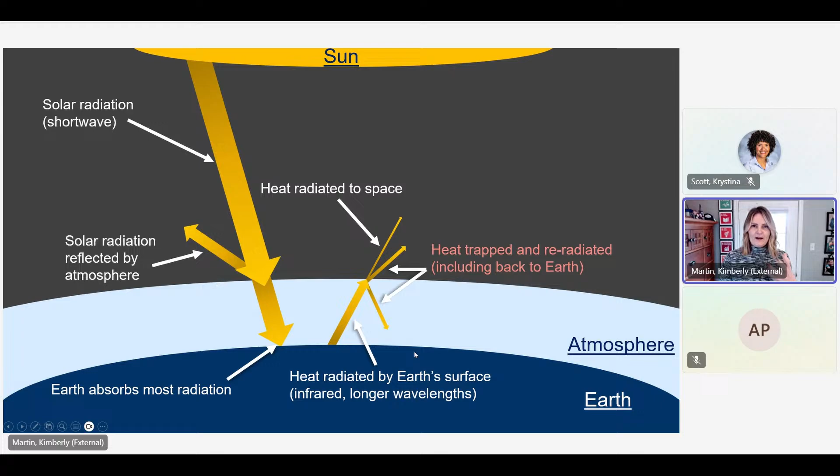What that means on a basic level is we have solar radiation coming from the sun. The thing to note about that is it's coming through in short waves. It gets to Earth, not all of it, but most of it, and it's then radiated out. When it's radiated back from Earth, it changes to longer wavelengths, the infrared zone of wavelengths. What that means is those longer wavelengths go back out to our atmosphere and they interact with the greenhouse gases that are there. The more we increase things like carbon dioxide, a key greenhouse gas, the more those longer wavelengths interact and re-radiate back to Earth. And that's what's really happening, and what we're really worried about is that heat trapped and re-radiated.

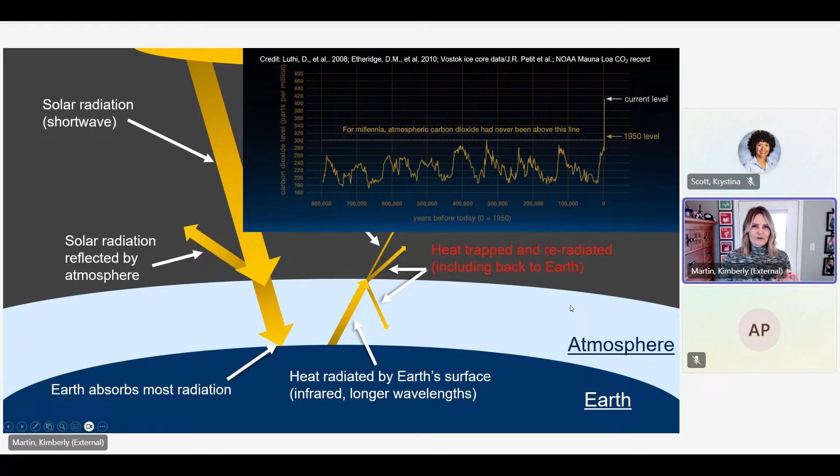And if you've seen this chart before, then you know that carbon dioxide in very recent times has increased after the Industrial Revolution at incredible rates to levels that haven't been seen for millennia. So that's what we're talking about when we talk about reducing greenhouse gases and why it's affecting the climate. So when I say climate action should be the place where we focus, I think of this infographic provided by Fuso Nerini et al. This is really a great way to map out how focusing on climate action may seem like one small part of all the things we could do when it comes to sustainability, but it actually has really broad impacts. I want to make that case for you.

So when we think of climate action, we can break it down into pieces. So one is strengthening resilience and adaptive capacity to climate-related disasters. And by doing so, we can impact SDGs 1, 2, and 11 as well. So as a geotechnical engineer in the geotechnical industry, you may say, what does that mean? How am I actually strengthening resilience and adaptive capacity? And why should I do that? Well, here's an interesting infographic from First Street, a company that does risk assessments for insurance companies. And what this chart is showing is that for flooding, this is saying how things have changed from a 1 in 100 year return period.

So places in white, the return period for a flood event, a 1 in 100 year flood event, is still 1 in 100, 1 in 90 years. But in many places, and you see along coasts and you see places where we have a huge population center, that 1 in 100 year return period is now 1 in 10 years or 1 in 5 years.

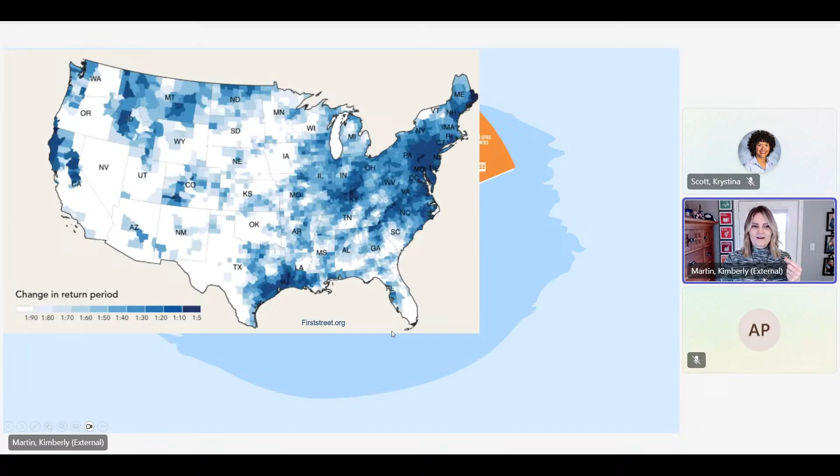So things are increasing. Climate disasters, we're seeing them in the news all the time. They're increasing, and they're increasing where people are moving to as well. So as engineers, we need to think, okay, we used to design for here, for this white area, but that white area has now become almost dark blue in some key places where we live and design.

But as a geotechnical engineer, what do we do about that? What are we building that addresses this climate resiliency and climate adaptation? One of the key things where you'll see this is coastal resiliency, preventing the flood interaction with coastal waters. So as an example, here's a case where Keller was working on the East Side Coastal Resiliency Project in Manhattan. This is to prevent the worst case flooding, particularly after we saw what happened with Hurricane Sandy, with $70 billion of damage from that hurricane.

So at the East Side Coastal Resiliency, we have a place where Keller and the geotechnical industry were providing 2,500 aggregate piers and 500 micro piles to support this new infrastructure that will help prevent the worst case damage. And you can imagine with that level of damage, how much poverty and how much damage to society was in that area all along the eastern seaboard. So now we as geotechnical engineers in the geotechnical industry can actually help prevent that from happening again.

Another place that climate action and carbon reduction comes into play is promoting mechanisms to raise capacity for climate planning and management. So we have to build the workforce of tomorrow, right, to do this. And when it comes to promoting capacity, we can think about what does our future workforce look like? And how are they going to be trained for the skills to design and build the things of tomorrow that are coming down the pipeline?

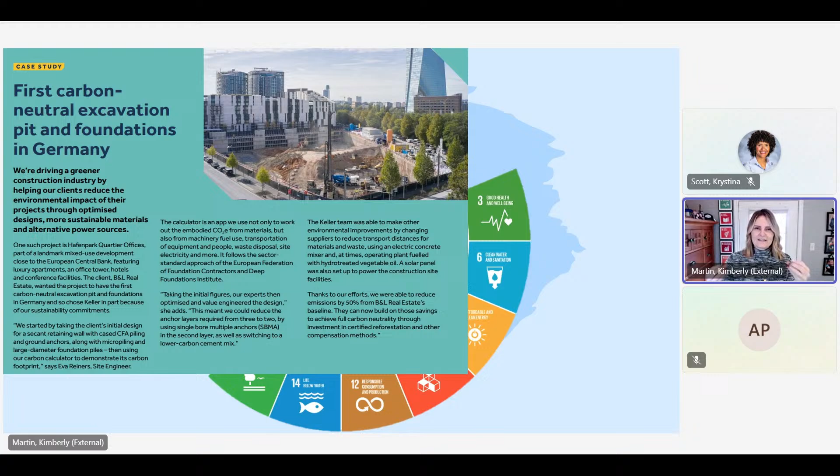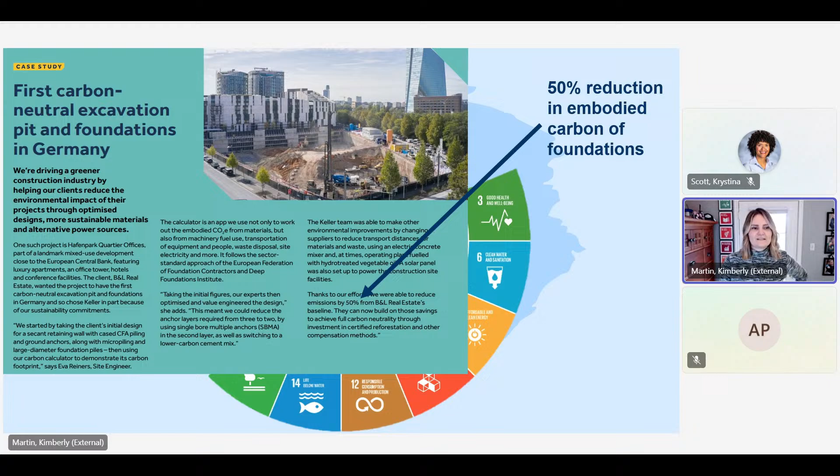And it was a lot of work for our teams, but having that owner say this is important to us allowed our teams to spend the time and get this done, ultimately having a 50% reduction in the carbon of the foundations based on what was originally proposed. So by doing this, we're using less resource, we're oftentimes reducing pollution, making it better for our workforce and a safer solution as well. So now you see all the ways that carbon reduction can impact sustainability.

So I think that makes it a good place to start, but there also are specific drivers as well. So this is in the EFFC DFI Carbon Reduction Guide. This is from the European Federation of Foundation Contractors and the Deep Foundations Institute. And it's just highlighting all these different ways that we see the push for low carbon solutions. So for example, legislation's a big one. We have a lot of up and coming legislation, things that have already been passed or in the works.

We have the SEC rules on reporting scope 1 and 2 for major corporations that are publicly listed. We have the federal acquisition regulation, which was requiring federal contractors to actively report their scope 1, 2, and 3 emissions. I'll define those scopes in a little bit, but basically report their carbon emissions, also the risks associated with climate change and science-based targets. Many of us wouldn't be major contractors for the federal government, but we often work for those federal contractors. So that means they may need that information from us.

Also, California is leading the way with sweeping climate measures. Aside from just climate reporting, they're definitely the state that's leading the way, saying they want major corporations that operate in California to be reporting their carbon emissions. That is a funded program and holding up in courts, so that is coming.

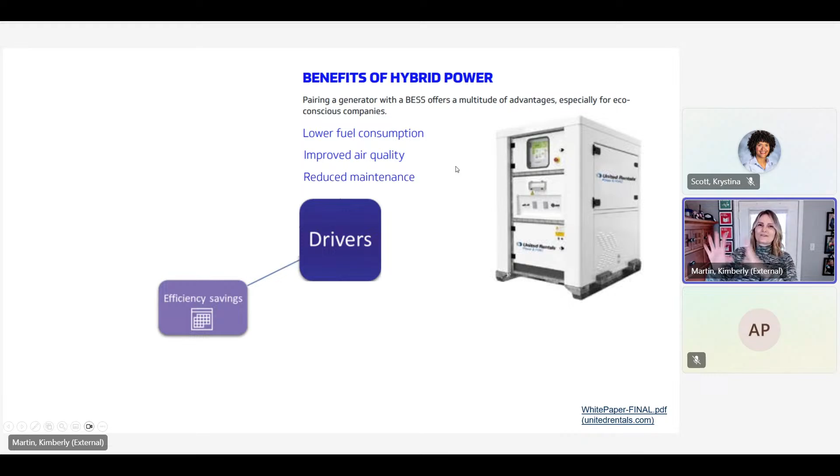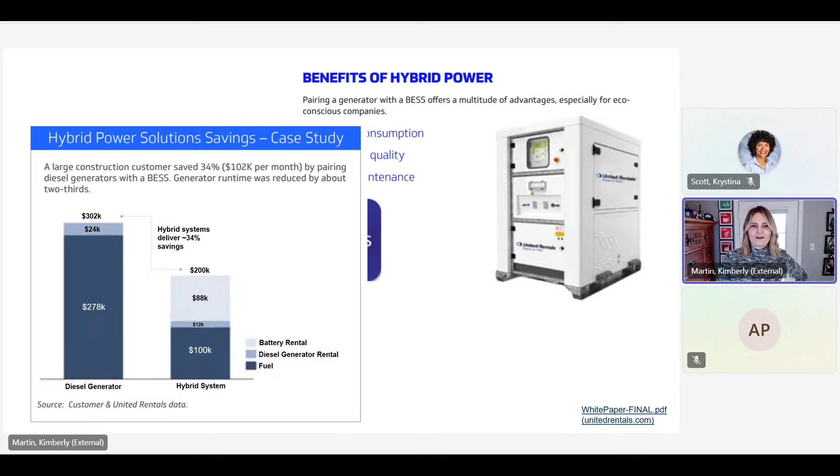So one thing that we can think about when we're thinking of efficiency is things like battery energy storage systems. So using hybrid generators, they can lower the fuel consumption, improve air quality. Like we said, lowering carbon can also do things like improve life on land and the other SDGs. And also they reduce maintenance. So this is just from United Rentals showing that even though the cost of the rental could be more, you're typically going to make back that savings because you're not going to pay for it in gas and maintenance.

Another driver is employee demand. And this is really interesting outside of our industry, but Lego is saying, you know, it's so important to our employees, we're going to link sustainability targets to the entire salaried workforce for their bonus structure. And they're doing this to attract and retain particularly younger generations. So that's something interesting to think about for the geotechnical industry.

Then we have things like managing risk. A lot of this has to do with the framework, the Task Force for Climate-Related Financial Disclosures. This is a really key framework that many companies that are publicly listed will report to. It's required in many European jurisdictions, particularly with new legislation coming out of Europe, but also in the California legislation as well. And what this is saying is a company needs to really assess how climate change is going to impact them in their operations and in business decisions that they make from a risk and opportunity standpoint. So Keller actually reports to TCFD.

So what this can look like is running different scenario analysis. So for example, this one would be, what if in Europe they say we can't use diesel-powered drill rigs after 2030? What would that mean to Keller as a business? What is that risk for us if in 2030 we couldn't use our diesel rigs anymore? That would be a big financial risk. So we run that scenario and then report that out so our shareholders and our stakeholders can understand what the risk is to us with the transition to a low carbon economy.

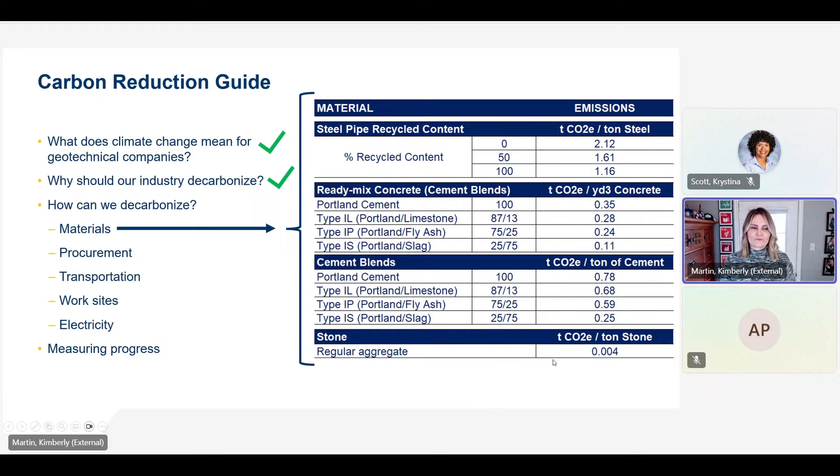So when we look at a ton of stone, the emissions are orders of magnitude less than concrete or steel or cement. So I just want to give you a flavor of what those are. I'm not saying we can't use steel or concrete or cement, but just recognize the difference in those emissions for those materials. So when we think about reducing emissions in the materials we use, we like to use the carbon hierarchy. It just gives us a good concept, right, to follow.

Okay, at the top, eliminate. Do we need this foundation in the first place? And believe it or not, we do have situations where we have to go to the client and say, we actually don't think you need a deep foundation solution. It does happen, but maybe we can eliminate it. Maybe we can do a Teams meeting instead of fly. Maybe we can just simply eliminate the concrete, cement, or steel from the solution. That's the first step. If we can't, then we move down.

Okay, we need this foundation, but now we're going to reduce the amount of materials we use. This is smarter design, more analysis, clever design to say, okay, can we reduce the number of piles and pile diameters?

Can we improve the efficiency of our process on site to reduce materials and also reduce fuel as well? Once we do that, then we can get to substitute. So this is what I was saying before with the substitution of materials. How much Portland cement can we replace with slag or fly ash? What can we do with renewable diesel, as an example, as a replacement for fuel?

Substitute is below reduce because we don't want to waste these important alternative materials. Just because slag is low carbon doesn't mean we should use as much as possible. We need to have that clever design, reduce what we're going to use, and then do the substitution. Then at the end, you can compensate with high quality carbon offsets.

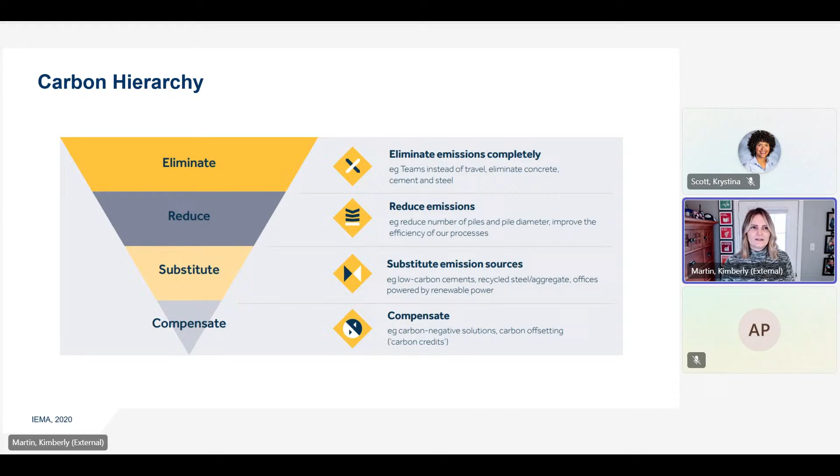So when you go to the guide, you'll see these key ways to decarbonize materials: reduce material quantities, like we just talked about with that clever design, substitute the low carbon materials, and also focus on reuse of materials. For example, are they doing demolition on that site and they're crushing concrete? Can we then use that crushed concrete in our aggregate piers?

And then lastly, engage with suppliers. We'll talk a little bit more about this, but engaging with your suppliers to say, hey, we want this material and we're going to be using it in this area. This is important because I notice when I tell our engineers or project managers, go use this low carbon material, they say, well, I can't get it. It's not available here. So we need to engage with our suppliers so they know we want it.

Next is procurement. Some key ways to decarbonize through procurement are incentivizing your supply chain. So if you're going to do a big project and you're putting out an RFP for concrete, for example, increase the weight applied to low carbon materials. Work with your client or the GC or whoever you're working for as the designer to say, hey, we want to make low carbon important, maybe even slightly more important than cost.

You can set minimum standards, and we're seeing that with companies like Microsoft, which I showed you, as an owner saying, we want a 30% reduction in carbon right off the bat. That's going to be the minimum standard for this project.

Consider these long-term partnerships. So I was just saying, engaging with the supply chain. They need to know, if they're going to bring in alternative materials and set up the infrastructure and the logistics to bring something like slag to a new market, are you going to want that slag next year and the year after that? We need to engage with them and have these long-term partnerships saying, yeah, we want you to do this, and we're going to continue to use it. That includes things like making efforts to make sure it's approved in the code or by the municipality.

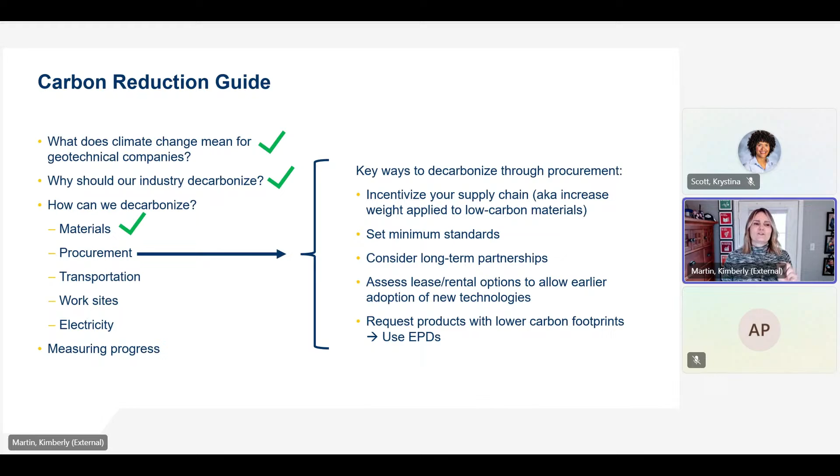Also, we can request products with lower carbon footprints. And the way you know that is happening is through environmental product declarations. So this is going to be really important for your procurement teams. You may see this coming, particularly for LEED projects, projects with federal funding, projects with clients that are publicly listed, particularly if they work in Europe, and companies that operate in California.

Environmental product declarations are provided by your suppliers, but they can also be found in databases. ASTM has a great EPD database, and Building Transparency has one as well. There are more. These databases are free to use. They also have higher tiers of EPDs.

This is where a supplier will say, using my product actually saves X amount of carbon compared to the baseline. And this could be really useful for people that are new to carbon reduction to say, oh, now I understand, the different process that they're using actually reduces the amount of energy required. So what does an EPD look like?

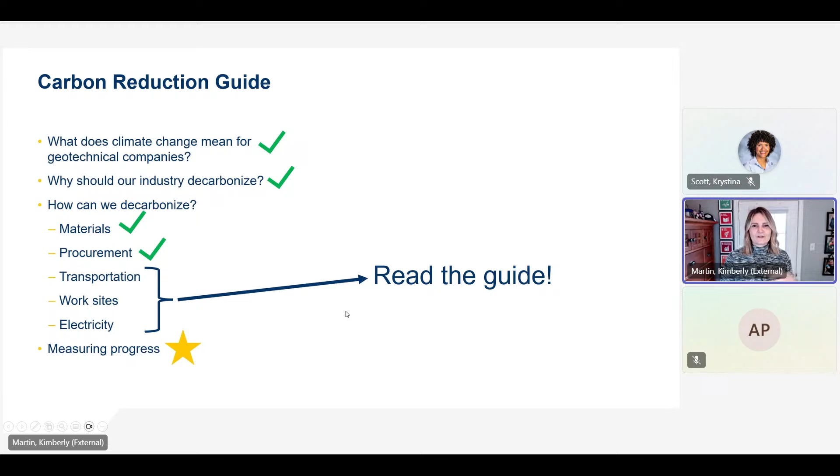I know we're running low on time, but I do want to talk about measuring progress. So when I'm telling you to go out and cut carbon, how do you do it? It can seem overwhelming. Doing a life cycle assessment, which is the background of those EPDs for the materials, doing that for our own projects is extensive and it takes a lot of time and it's difficult. It's unlikely to be done on something unless it's a very big project with an owner who wants it.

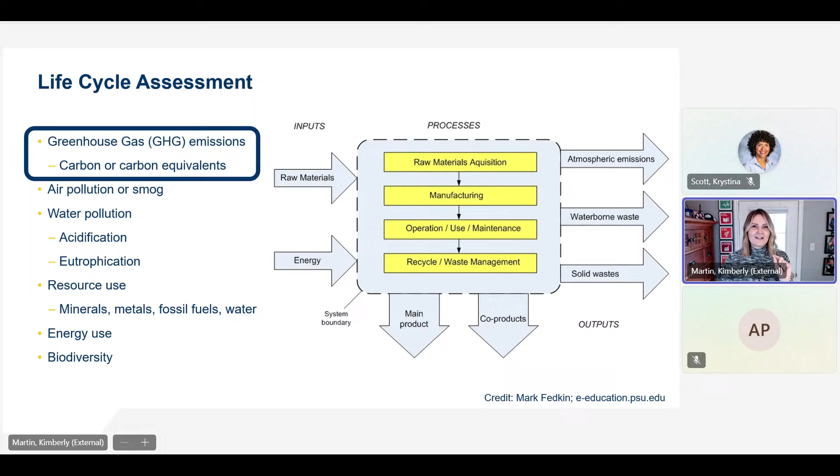LCAs are great. They give you all this information, as you saw in the EPD. It's way more than carbon. But as I said, I think carbon's a great place to start. So just focusing there can be really useful because it's a little more bite-sized and we get something we can get done today. What I recommend you use for our industry is the EFFC DFI carbon calculator. It's industry developed and accepted. It meets the ISO, GHG, and PAS standards.

It's Excel-based, probably likely moving to web-based in the next year or two. It's cradle to gate. That's saying from raw material extraction to getting those materials to site to installing them in the ground, handing that foundation solution over to our client. It covers all of those emissions. And so it's reporting scope 1, 2, and 3, and it's doing that in carbon dioxide equivalents. The best part is it's free. You can go to geotechnicalcarboncalculator.com and download this and the guide.

There's lots of videos online as well through the DFI or EFFC on how to use this calculator, so I'm not going to go into that here, but just know it's available and it can provide you that detail, that measure of, am I actually doing better? And that's why I like it. Because using these emission factors, they're updated every 2 years. You know you're on the right track. You can input the EPD material-specific information like I showed you.

But it also is for our industry. So they've done the research, they've done the case studies to say, hey, if you're doing a drilled shaft solution, likely 95% of your emissions are coming from your materials. So if you're going to reduce carbon, you should focus on your mix design. If you're doing something like stone columns, stone's that low carbon material, here maybe it's a better use of your time to look for renewable diesel. So it's really nice. It also provides simplified ratios.

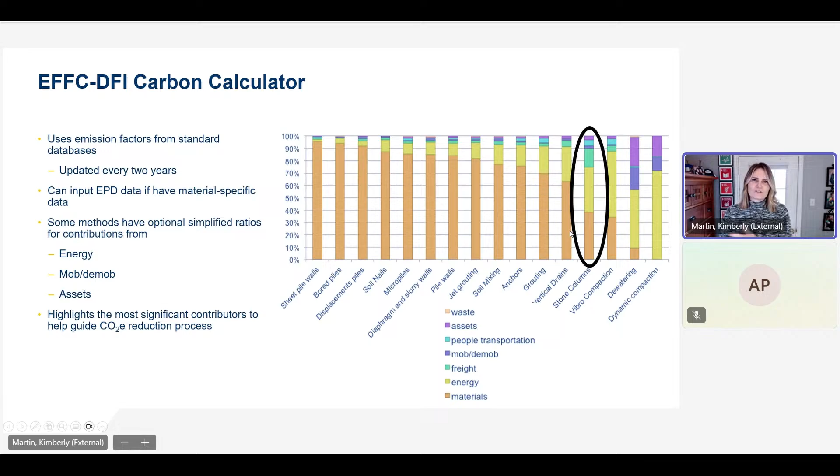So if you're a designer and you don't know how much fuel would be required for a stone column solution or mob demob or the asset depreciation and how you would allocate carbon for the equipment that we use, for certain more common techniques, this tool has simplified ratios to say, hey, this is what we expect. If you know how much stone you're using, then you can estimate how much fuel is going to be on that site. So that allows us to get early information even before the project is too far down the line to say, hey, this is where we need to focus.

Okay, so what is this carbon calculator asking for? Typical information that you would have in the design or a contractor would have in their estimate. Material quantities, the amount of diesel we're using, where things are coming from and how they're getting there, where the waste is going, and then the weight of the equipment.

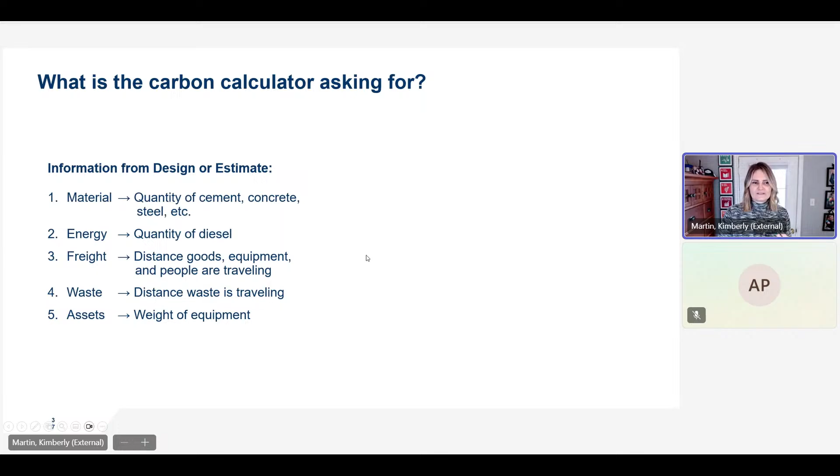An actual carbon calculation is not that complicated. It's just the quantities times an emission factor. The emission factors are what's hard. So that's why this tool is so great. It's providing you those current emission factors. You don't have to worry about trying to find them. And then it's outputting the carbon emissions.

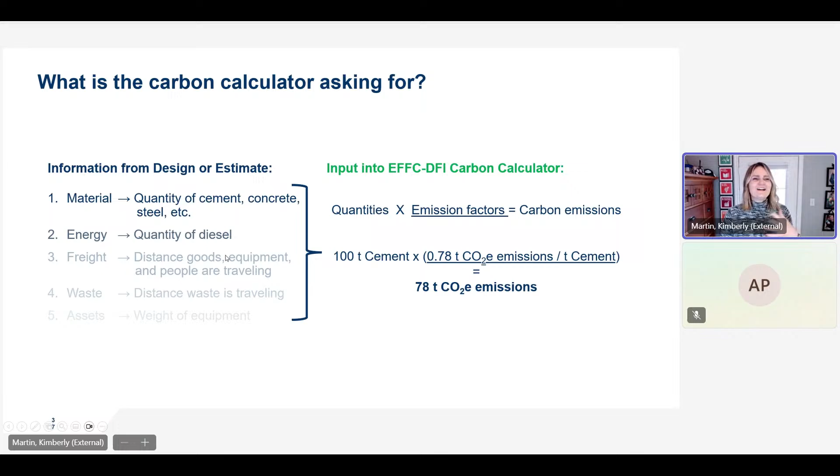So all it's doing is 100 tons of cement, you input that, it knows the emissions factor per ton of cement, and then it outputs the total quantity of emissions that you're going to have for all of these things. If you're a designer and you're not sure about many of these things, here's the hierarchy. Materials, like I showed you, is going to be the most important thing. Then diesel, if you can figure it out. But the other things are likely not going to be as important when it comes to the total carbon. Not that we don't want to reduce them if we can, but really you're going to want to focus on material and then energy.

There are other areas to reduce carbon. We do want to focus on site selection, site characterization. We want to have that lens of carbon focus when we go to design. Think about load testing. That can help with the factor of safety and reduce risk. If we go to a site, we don't know if the foundation solution is going to work and we have to make a change in the field, it's going to cost a lot of carbon. That's just how it is, right? We have to get it done. So as much pre-planning as we can do to better understand the site, the better we're going to be. Also, moving to performance-based design is going to be key.

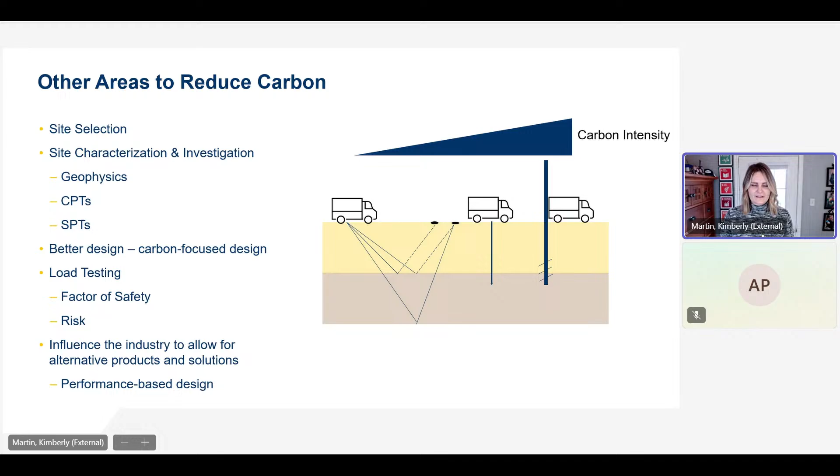So what does this actually look like? I'm just going to do a quick case study showing you the power of carbon calculations and EPDs. This is just an example, a micropile project in the Northeast of the United States. We ran through material quantities, fuel, all the other details. You can see how material quantities and fuel are really driving the whole design, so we don't need to worry as much about these. But this was an interesting one because the steel casing, we didn't have a mill certification for. So we assumed 95% recycled content. But really, we knew that steel casing was repurposed, but we didn't know how to account for that.

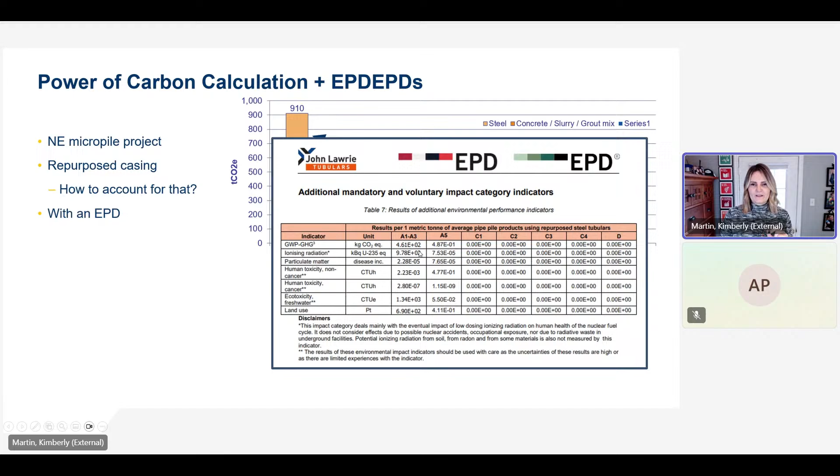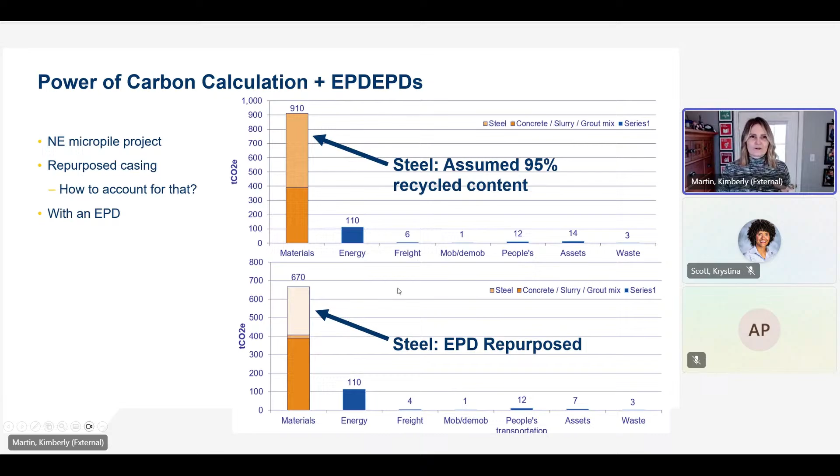So luckily, we now have an EPD from our supplier, John Lawrie Tubulars, and we can go in and say, okay, for 1 metric ton of that pile, here is the emissions that we can use to calculate our carbon footprint. And now we can put that into the carbon calculator and you can see it's a reduction in carbon emissions. Well, also it's the more correct answer. So we know where to focus. And this is just the power of using the carbon calculation and EPDs together.

So lastly, I want to touch on the circular economy because this is another resource available to you. This guide was issued by the EFFC, but will be reissued in January by the DFI as well. And this is just another up-and-coming area related to sustainability that I think is important for the geotechnical industry, but also a place we can make a lot of improvements. And this is really focusing on SDG 12, responsible consumption and production.

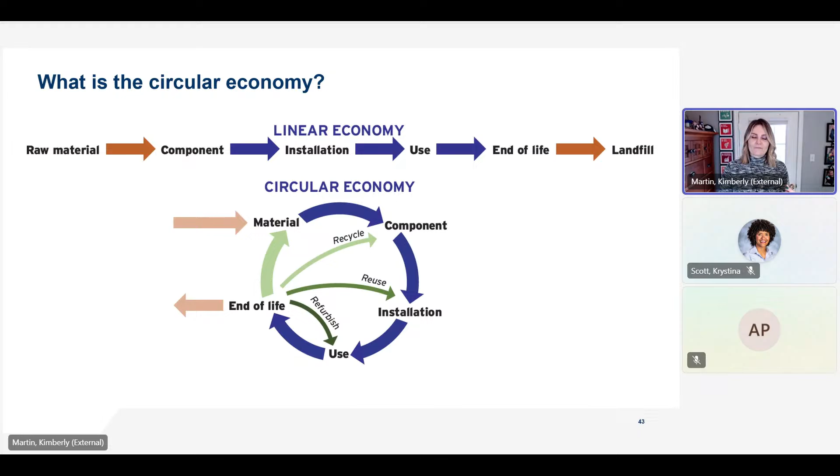So what is the circular economy? It helps to know where we're starting, and that's with the linear economy. What we have now typically is raw material extraction, moving through manufacturing, coming to our site, installing a foundation, it being used, and end of life is likely staying in the ground or the landfill. What we want is to move to the circular economy. That's basically saying, how can we eliminate that end-of-life landfill and either recycle, reuse, or refurbish? And that's the point of the circular economy, limiting manufacturing of new materials to lower our impacts and help us live within the bounds of our ecological system.

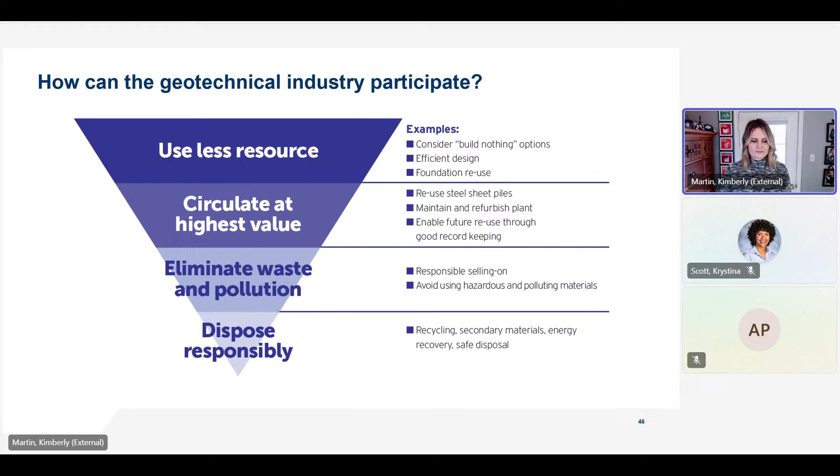So quick wins for the geotechnical industry are reusing spoils on site. I think most of us as contractors or designers are trying to do that, right? How can we keep the material we're pulling out of the ground on the site and reuse it? This is a big thing for linear infrastructure like roadways, but also we can do this on our sites as well. We should really focus on it. Why take that material somewhere else when we could use it on site? Reusing drilling fluids, recirculation is really important. Here is a spoils separator that we use in Europe at Keller.

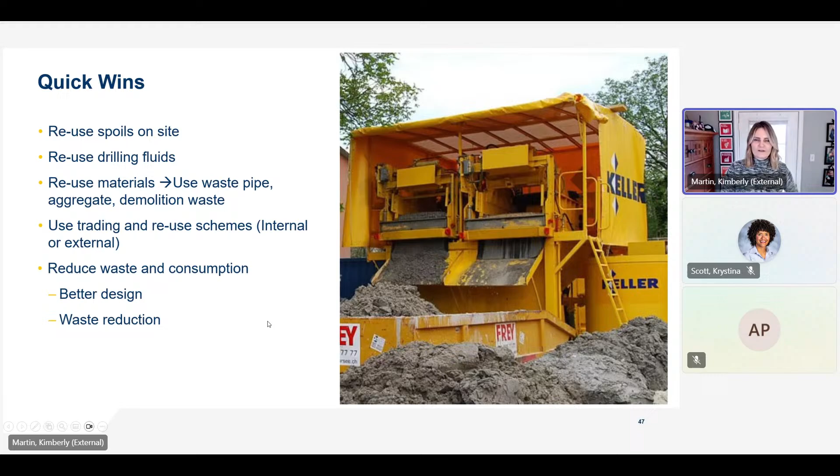Also reusing materials. We have waste pipe, aggregate, demolition waste. We can use those things like we talked about, repurposed pipe as well. We can use them and keep them in the economy at their highest value. Use trading and reuse schemes. So this can be internal or external. For example, we have a piece of equipment we're not using anymore. Maybe another division of my company could use it, or maybe another company could use it. So keeping that equipment, as long as it's operating efficiently, in use instead of sending it to be scrapped. And reducing waste and consumption. So again, better design and waste reduction.

So I did say circulating materials at their highest value. I just want to mention what that is. So recycling is what we want. It's the coveted highest end, right? Converting materials into something with the same value as before. We can think of that in the metals industry, particularly aluminum, recycling right back into aluminum. Downcycling is the alternative, and that's better than nothing, but also less preferable. So downcycling is recycling something into a lower quality.

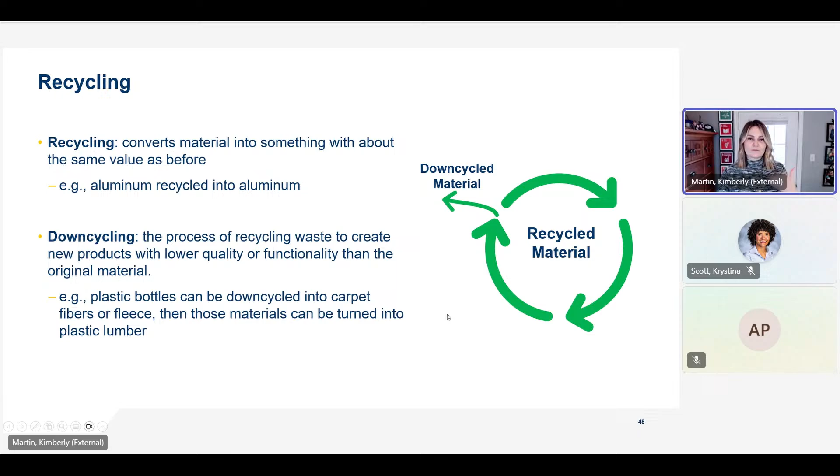So for example, many of us know plastic cannot be recycled infinitely. It can also not be recycled at the same highest value. It's downcycled. So a bottle could be downcycled into fibers that can be downcycled into plastic lumber as an example. So downcycled is not as good. We want to stay in that highest level of circularity. And that's why it's so important to think about things like steel. Should we put it into the ground? If we have an alternative, it should probably stay out, because once it's in the ground, it's likely never going to come out. So what are the big implications?

So quickly, I have 1 minute, I think. My final thoughts are we can reduce carbon on every project. Many carbon reduction efforts will save cost and or schedule, because oftentimes we're doing things in a better, smarter way. But also remember that it's okay to start with carbon reduction as a focus, because you'll also positively impact other SDGs. There are challenges. We need to support innovation, new ways of thinking. Changing designs late in the game is difficult, and sourcing materials, as I mentioned, can be hard.

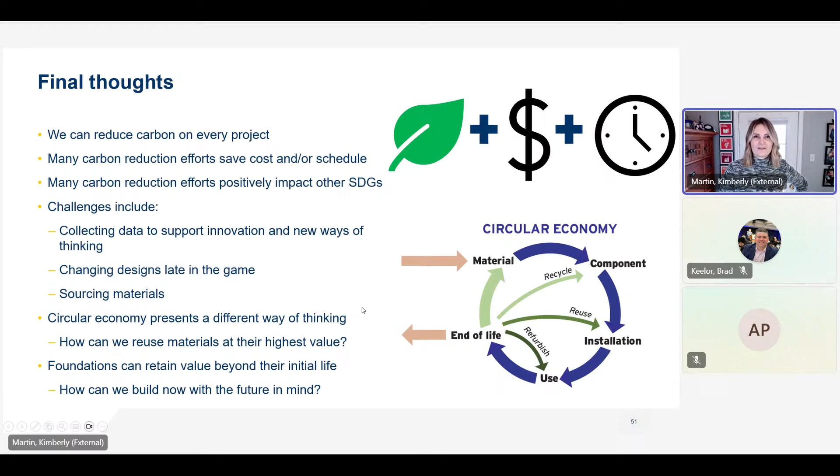But also let's think about, in terms of circular economy, presenting different ways of thinking and how we do things, for reusing materials at their highest value, and also thinking about foundations retaining their value beyond their initial life, and how we can build now with the future in mind. So I think there's a bigger target for sustainable development than I originally presented. It may not be as hard, but hopefully now we think of it also with the circular economy encompassing it as well.